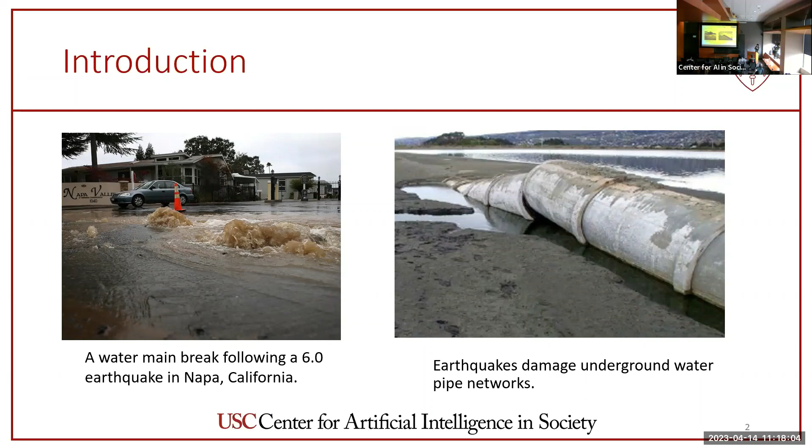So Los Angeles, for example, has a very high seismic hazard exposure. So the city has an ambitious goal of forming a system-wide seismic resilient pipe network. So they want to replace some of the old pipes with earthquake-resistant pipes so that during an earthquake, these pipes are less likely to be damaged, and so they can guarantee continuous water delivery to certain locations and also help restore water supply in areas suffering from water shortage.

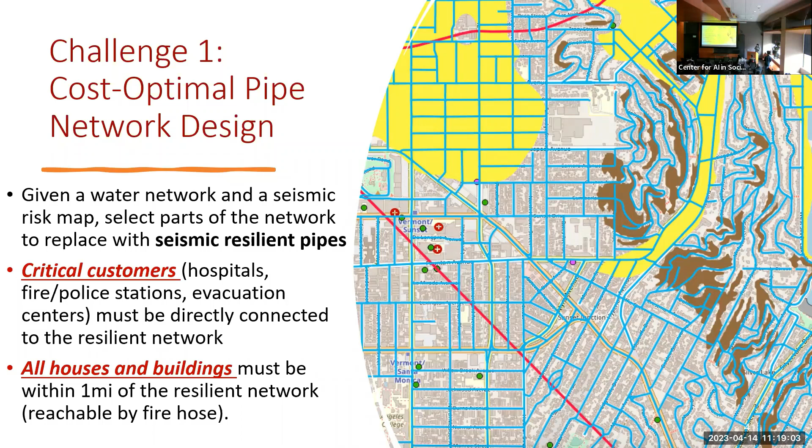So building such networks has to meet several requirements. First, it has to be cost optimal, and also critical customers like hospitals, fire stations, police stations, etc. must be directly connected to the resilient network. And also all the housings and buildings, including all the residents, must be within a certain proximity of the network, so they are close enough to water when there are water shortages.

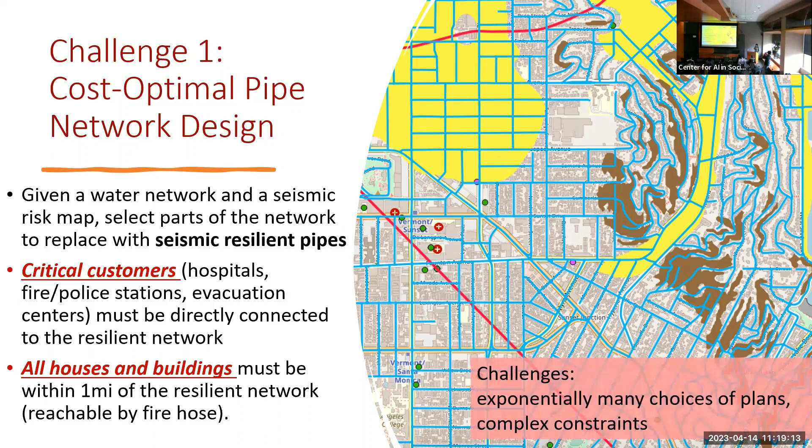So there are many challenges because there are exponentially many choices and very complex constraints to deal with. And the other challenges come from installing the network. So even if we can obtain the optimal plan, it is very difficult to install the network in a short period of time because of limited budget and resources

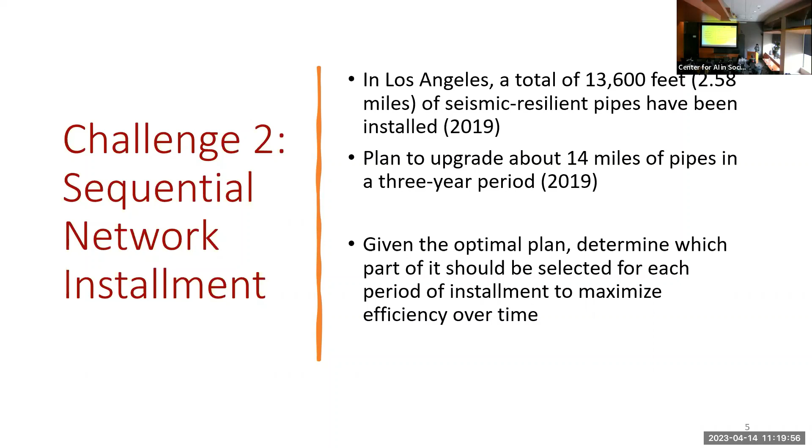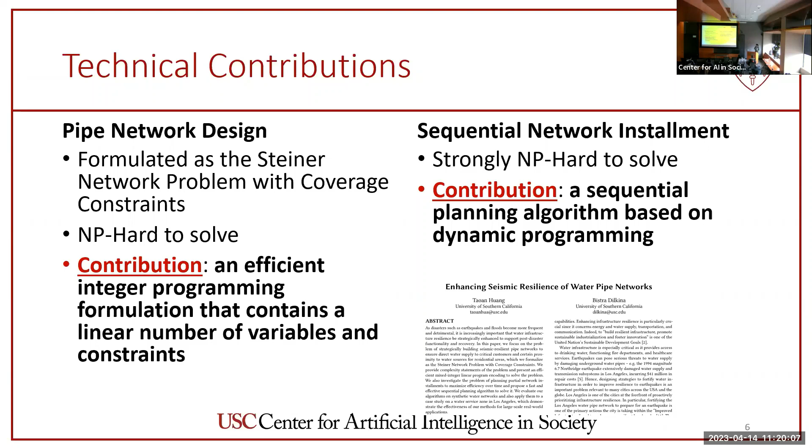and difficulty of construction. So in 2019, Los Angeles had already installed 2.6 miles of pipe, and they plan to continue to upgrade about 14 more miles of pipes in a 3-year period. So in this situation, it becomes a very important task to effectively determine which part of the pipe should be selected for each period of installment to maximize efficiency over time. So we formulate these problems as combinatorial optimization problems and provide scalable and efficient algorithms to solve them.

Without going into too much detail about the algorithm, let's look at some results produced by our algorithms on two 8-mile by 8-mile regions in the city of Los Angeles. So here we can see in the figures, the pipes are showing different colors. Green pipes are those in the safe zone, whereas the blue and red pipes are those in the hazard zones. So for example, blue pipes are in the liquefaction areas and red pipes are in the fault zones.

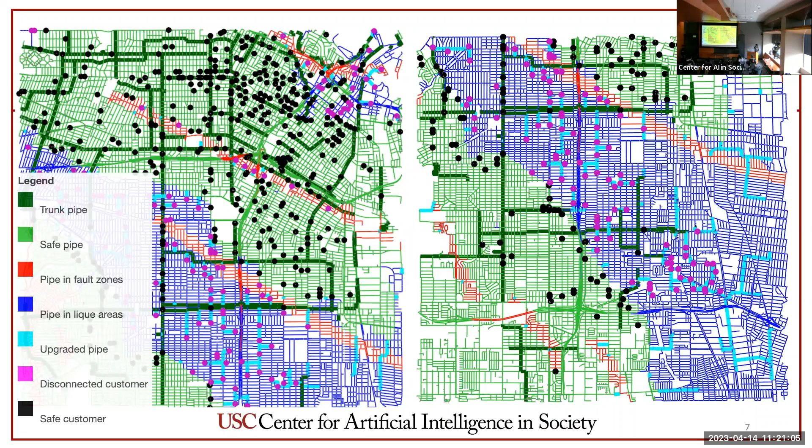And customers are represented as the dots. Black dots are those in the safe zones and purple dots are those in the hazard zones, so they are more likely to be threatened during an earthquake. So our goal here is to optimize the placement of resilient pipes, shown as the light blue segments here, so they can guarantee to safely bring water from the safe zone to customers in the hazard zone that are threatened during an earthquake.

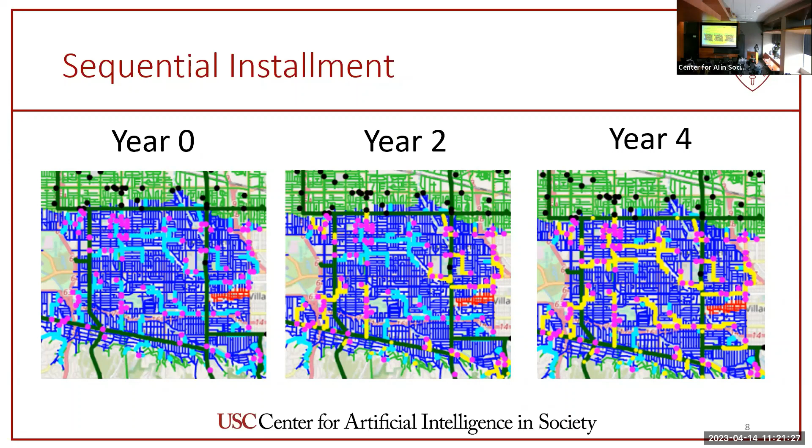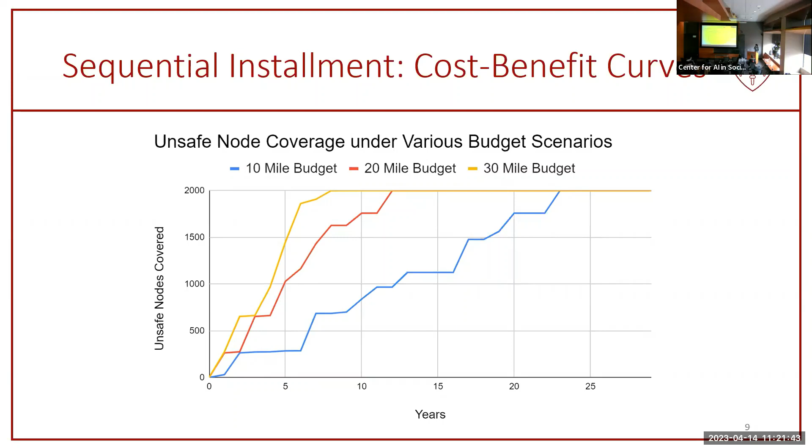So our tool can also recommend which sets of pipes to install in different periods of time. And so we can also provide visualizations to see how the pipe network grows to reach customers over time, shown as the yellow segments. And also our algorithm can provide cost-benefit analysis to study the trade-off between different budget allocations and the speed of gaining benefits from the network.

And finally, on the practical side, we have developed a software tool, and this has been transferred to our partner at the Department of Water and Power. We gave them our code and documentation, and we have done training with their engineers. They are now able to run the tool with their own data. And the next steps include interviewing more stakeholders to understand their needs to make the tool more robust and easier to install, use, and maintain in the future.